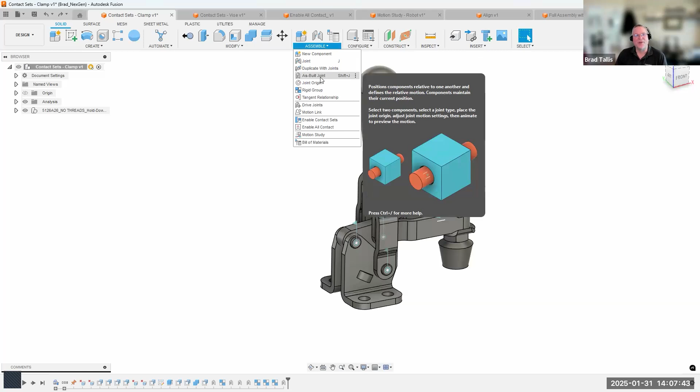Everybody, again, like Chase mentioned, this is a three-part series. We've been going through at a fairly high level, touching everything about assemblies. Last session, part two, we covered the joint command and the as-built joint command. Today's session, I'm going to cover the rest of these commands, such as contact sets, motion studies, bills of materials, and some methodologies for dealing with large assemblies.

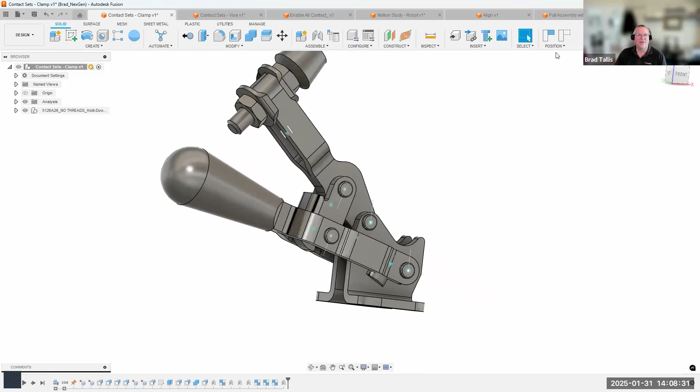In this example, which I showed last session, we used as-built joints to bring in a McMaster-Carr toggle clamp and quickly add as-built joints to simulate how this clamp would work. But notice it has a mechanical hard stop. When I drag this handle, it's basically slicing through that hard stop, and I want to know exactly how far this clamp can move before it physically hits that hard stop.

That's where the contact set command comes into play. You'll notice it says enable contact set and enable all contact. Be wary of all contact - it analyzes everything in your design and uses a lot of memory, with lots of calculations. If you have lots of faces and components, it can really bog down your machine. So I'm going to say enable contact sets, which is basically like turning on a big switch, saying we want to deal with contact sets.

Now if I come into this assemble menu, there's a new command called new contact set, and you can see a new option in the browser. I'll say new contact set - it's a simple command that just asks what are the bodies and components. I'll select the arm and this base, and it will analyze whether these two components or bodies will intersect with each other.

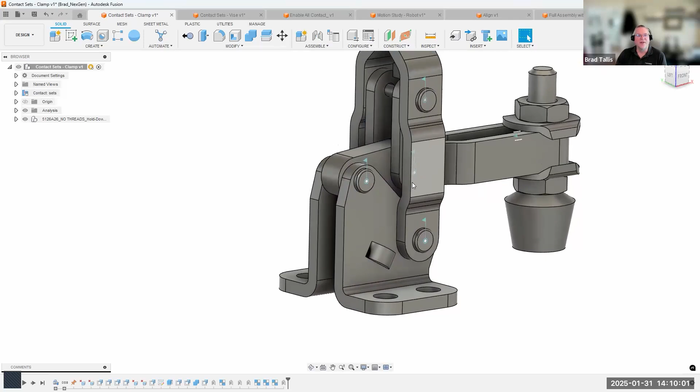Now when I start to drag this handle, everything works the same, but as I continue to drag, it hits that mechanical stop. Even though I'm continuing to move my mouse, it physically can't go any further - it's hit that mechanical stop. Now I know the overall height that this clamp would be. Let's say this is mounted to a CNC machine - I could take measurements and figure out if my gantry will clear this clamp during a fast maneuver.

One of the tips I like to share: I can come under the assemble menu and say drive joints, and click on this Revolute joint. It's telling me that this has rotated 62.8 degrees, so I know that's how far back this handle can rotate before it hits that mechanical stop. That's a cool method.

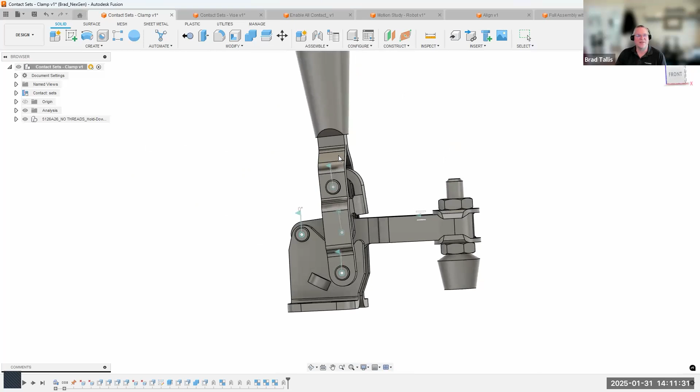Now if I go this direction, you'll notice this piece intersects with that piece there. So I could do another contact set - new contact set, that guy and that guy, I'll say okay. This one still works - you can see it stops back there. And if I go this way, it stops going forward like so. Now we know the physical range that this handle can move in this design using contact sets.

Here's another quick example. We looked at this one last session where we created slider joints and did a motion link to connect the two slider joints together, and also a motion link with the slider joint and the revolute joint. As we rotate this guy, the jaws move, but notice they intersect with each other. Obviously we don't want that, but I want to know when they touch.

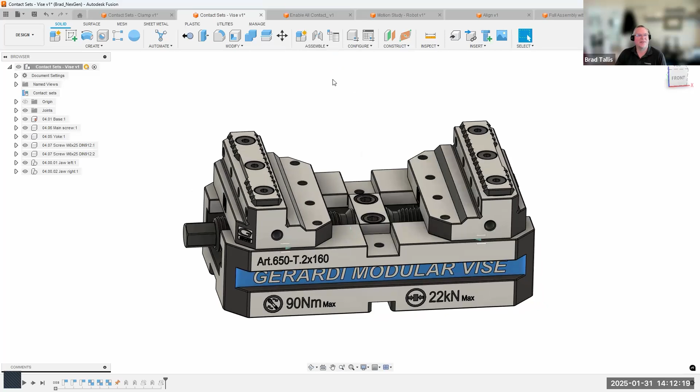So I'm going to do the exact same thing real quick. I'll come in here and say enable contact sets, then do a new contact set, and I'll just pick these two components and say OK. And I'll start to drag - you can see that they stop when they touch.

Now I'm going to zoom up a little bit and you'll notice there's still a gap. This is one of the things with contact sets: I'll drag and then stop, then drag again, because it's doing live calculations. As I'm getting near, it slows down and starts to calculate. So I get close, drag a little more, and you can see how it gets as close as it can. There we go, by zooming up I was able to get a better result.

So sometimes I'll zoom up to make sure I get the result I'm expecting. It's almost like the incremental move: the farther out you are, the more it jumps as you move something, but the closer you are, the finer the precision.

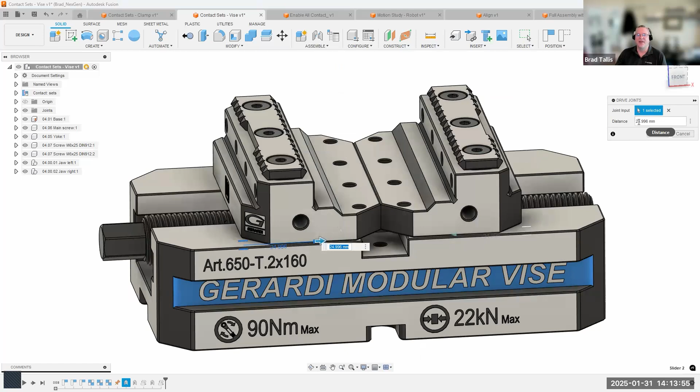It's kind of the same idea with contact sets. So I'm going to come in and do the drive joints and click on this slider joint, and now I have this distance. Why am I doing this? I want to set some limits, so I'm going to copy this with Control C, then drag this out and disable my contact. The reason I'm disabling it is I don't want it doing the live calculation all the time.

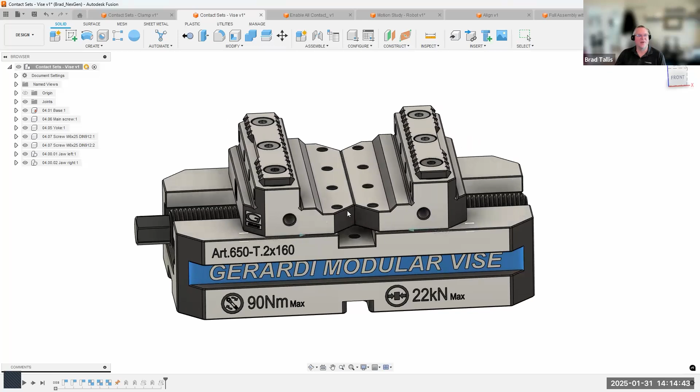Now I can come in and do my motion limits. Let's do the maximum limit, and I'll paste that in there: 24.996. I'll say OK, and now as I drag this, you'll notice it stops — that's the limit it can go. It's not doing the contact sets anymore because we disabled it, but we used the contact set to figure out how far this jaw, or these jaws, can actually move. It's a neat little trick to physically figure out how far these parts can move, and then we use that to set the limits for our slider joint, for example.

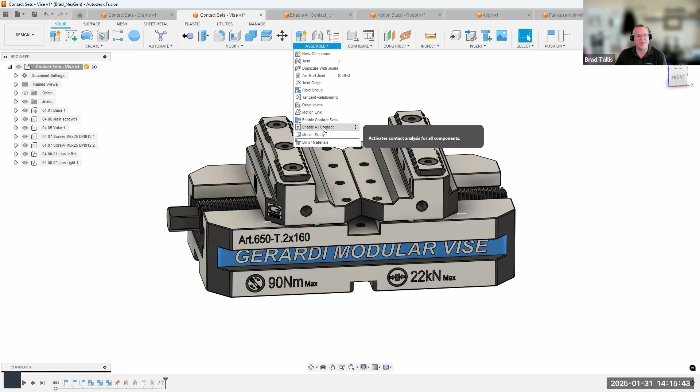Okay, so that was contact sets. We also have this enable all contact, and I'm going to show an example of this in just a moment. Like I mentioned before, be cautious with this one. I would not use it on something like this because of all the faces, and this is running through another part here that might be threaded or something like that. It would take a long time to calculate and you wouldn't get the result you would expect.

But here's an example of what enable all contact does. You'll notice I have no joints in this example, whereas over here we have joints like sliders, rigid groups, and motion links, etc. So if I were to just grab any of these parts, they move around normally. I'll come in here and say enable all contact, and that's all you have to do.

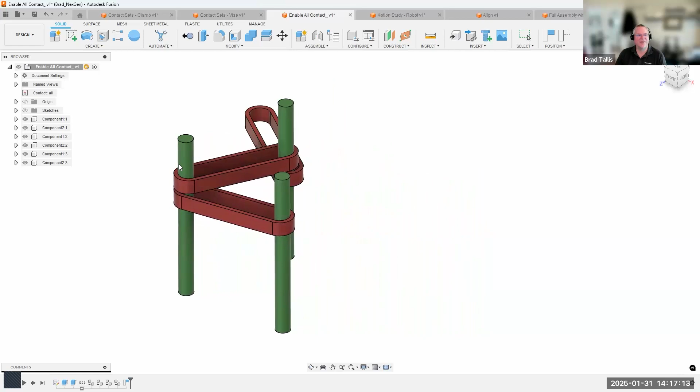If I grab this green bar, you'll notice I can move it around. As I drag it to the right, it's going to catch that red band or that red link, and you can see it's pulling that link. As I continue to drag, it's going to grab that other green bar, which grabs that other link, and now I'm pulling all of those together. Again, it's calculating this live. If I grab the middle one, you can see how it's interacting with all of this together, so we can simulate how these things would work as I pull it along.

Now you'll notice I was dragging it fairly slow because, like I mentioned, it's doing live calculation. If I go too fast, you're going to see it can't calculate. I was actually able to pull the rod out of there, and now I can't get it back in unless I go up underneath or whatever. But it's kind of interesting to see what you can do with this — now I'm rotating that red band around by just pushing up on it.

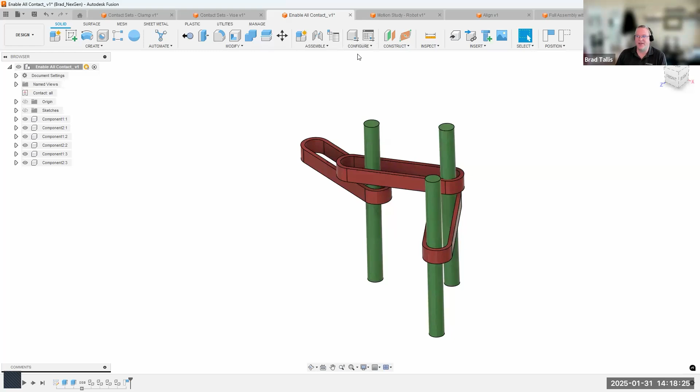So it's kind of an interesting way to simulate how things would interact with each other. Honestly, what I typically do with enable all contact is I will still try and add as many joints to my design that kind of builds the intelligence into my design. So, for example, if I had a robotic arm or something like that, I would build in all the pivots and the rotations and all that kind of stuff. And then I would use the enable all contact to do whatever movement that I want to see in that design. And by having those other joints, it just speeds up the solving, because it knows it can only rotate or something like that.

So I don't use all contact all that often, but it does come in handy every once in a while. But definitely contact sets I use quite often, especially for trying to figure out, like in that vise example, how far things move, when do things contact, what is the range of how far things can physically move.

Okay, the next command is motion study. So here I have an example of a robotic arm. You can kind of see I've got some as-built joints in here so it can pivot and rotate around. We've got elbows and wrists and all that kind of stuff here. So you can kind of see how everything moves together.

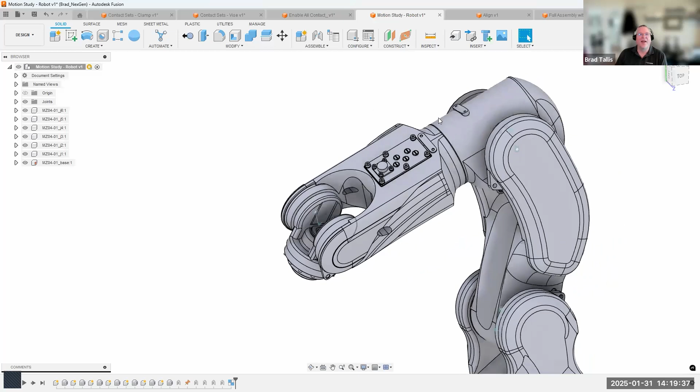And I might want to do what's called a motion study. So I'm going to come in and click motion study here, and let's just move this around so you can kind of see what's going on. And it says select joints to animate. So I might pick, for example, this rotational joint right there. And what it does is it puts it over here. It tells me it's a revolute joint, and then you see this line that goes all the way across, and it's almost like a timeline from 0 to 100. And it says select the curve to add animation points.

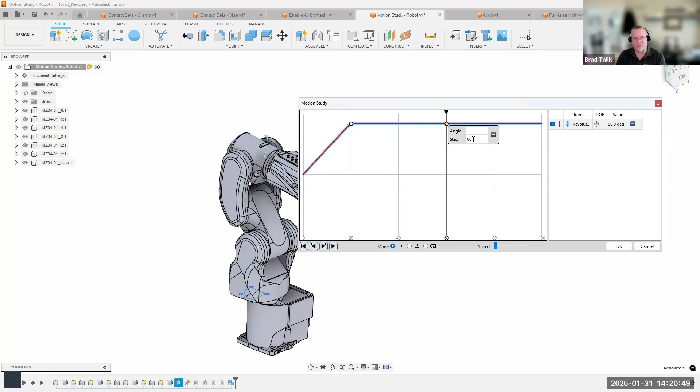So for example, if I click at like point 20, we can see that it's at 0 degrees. Well, I might type in like 90 degrees. I'm just going to hit enter, and you can see that it rotated 90 degrees. And from frame 0 to frame 20, it's going from 0 degrees to 90 degrees. So now let's go to maybe frame 60. I'm going to click over here and let's go to like minus 45 degrees. I'll go ahead and click there. And we can see how it kind of updated that. We're basically telling it at what angle and at what time do we want it to be at that angle. And then finally at like frame 100, let's go back to 0 degrees. I'll do something like this.

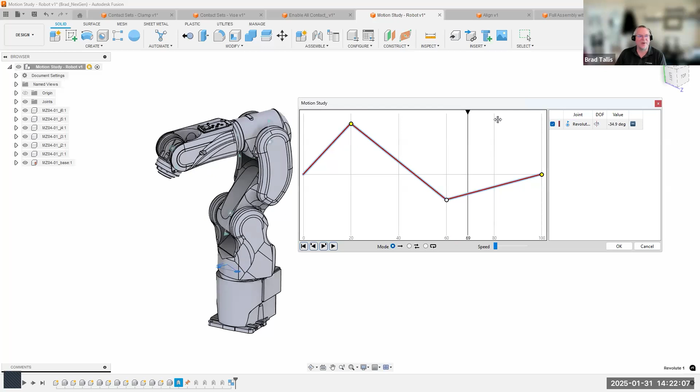Okay, now I can grab this slider and slide back and forth, and you can kind of see how it's animating this movement. It's almost like if you've done video editing, you're basically creating what we call keyframes at particular points in time. And I can hit play and it's going to go ahead and play. You can kind of see how it moved really fast at the beginning and then it went slow near the end. That's because in a short amount of time, only 20 frames, it's moving like 90 degrees. And then over 40 frames, it's moving from 90 to minus 45, so it's having to move pretty far. But then over the next 40 frames, it's only having to move 45 degrees, so that's why it goes pretty slow right here.

Okay, and it's kind of a cool way to visualize how things interact with each other. In fact, as I'm dragging, I can see this value, so I could see that around frame 47 is when it basically goes back to around 0 degrees. In this case, it's about 1 degree.

Okay, well now let's add in some more complexity to this. So I'm going to go ahead and click on another joint. In this case, it's a revolute joint. You can see it put another bar across here, or another line, and we can see that one's a revolute also. I probably should have picked something that had like a slider joint or something like that in here. And I can do the exact same thing. So it's going to keep track of my original move here, but as that's rotating around, I might do something like at frame 40, let's just make that go 25 degrees.

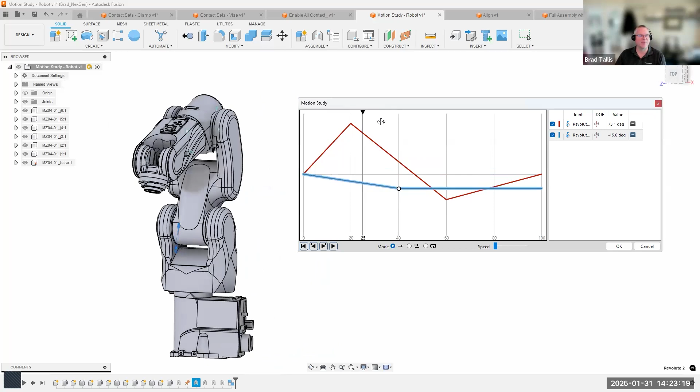Let's make it go and go minus 25 degrees. Okay, so now as this is rotating, you can see that it's bending down a little bit. It's kind of hard to see, but watch this body right here. You can kind of see it's starting back a little bit and then rotating forward. And then maybe we want it to rotate, let's just say minus 90 in this case, like so.

And now we can simulate how that works together. We can continue doing that with any of these joints and basically create something like an animation, but it's more of a visualization of how this thing would work. So let's just do one more.

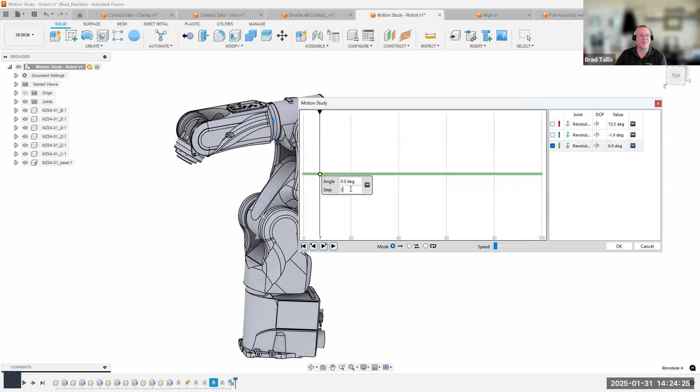I'll click on this guy here, and I want to simulate it rotating from minus 90 to positive 90. Let's go at frame 0. Let me turn these guys off real quick and select that curve. I clicked out here, but I could come in here and say at step 0, let's make that minus 90 degrees, then make that step 1, and then do something like this, and let's make that 90 degrees. Okay, I can turn the other guys back on.

Let's just drag through this real quick, and we can see how that whole thing is rotating and moving around. Now, one of the cool things you can do is you have some options down here. If I hit play, it just plays it once. I can also do ping pong, so it'll go back and forth, or I can do loop, where it just keeps looping over and over again.

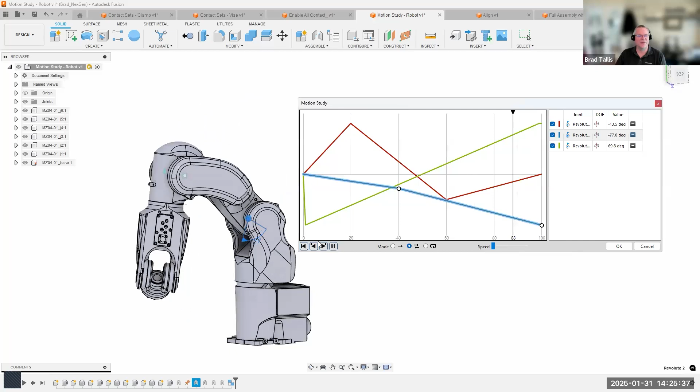I can also control the speed, so we can slow it way down or speed it up. One of the things I typically do is visualize what some of the values are at certain points in time as things are moving around. The fact that I can see what these values are at certain points is pretty neat. Now, when I say OK, it creates a motion study over here. I can always come back and edit that motion study and make changes to it. I can click on any of these points to edit them.

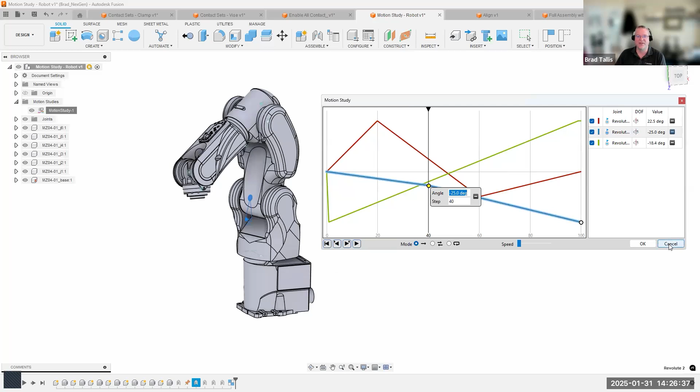So that's basically it for motion studies. Unfortunately, you can't render out a motion study or create a movie of it. I wish you could. If you wanted to, you could do some kind of screen capture, like with Camtasia or ScreenPal or something like that to record the movie.

Okay, I'm going to jump over here. The next thing in the assemble menu is bills of materials, and this is actually fairly new. So I'm going to click on bills of materials, and it analyzes your design.

Now there's a couple tips and tricks with this. You have to have your designs saved before you can do a bills of materials. So if I were just designing stuff and ran bills of materials, it's not going to show anything. I would have to design stuff, save my design, and then run the bills of materials, and then it would show this list.

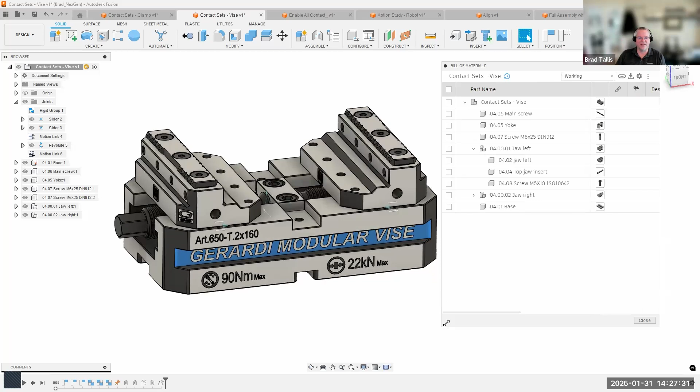Also, there's a lot of information here, so I'm going to stretch this out a little bit. You can see it's broken down into the top level assembly, so I'm going to match it over here. We have the top level called this contact sets vise, and underneath that we have some components and some sub-assemblies like this jaw left and jaw right. You can see that here also, so here's the base, the jaw left, jaw right, the yoke, etc.

And then there's cool little thumbnails. If I just hover over these, it shows what each of these components is—so that's the yoke, here's the screws, etc. And then here's the subassembly of the jaw, and if I expand open this subassembly, you're going to see the individual components that comprise this subassembly.

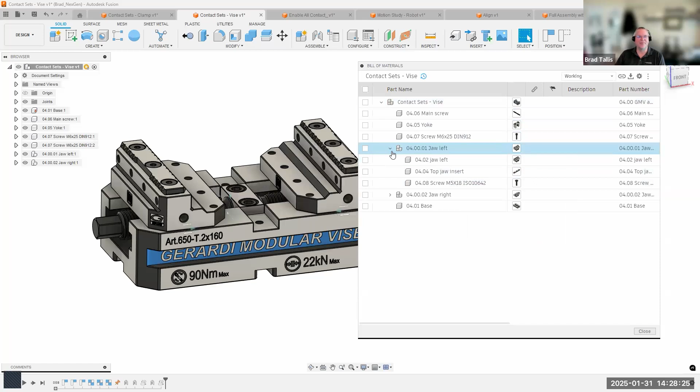Another cool thing is if you click the little checkbox next to any of these, it highlights it in your viewport and also in your browser. For example, if I expand this open and click on just the top jaw insert, you can see it highlights there and in my browser.

If I scroll to the right, I'll come back here in a second. You'll notice it shows a quantity. For example, this quantity of 3 is related to the screws in this jaw assembly, and the quantity of 2 is for the screws in the yoke.

Now, I'm not going to spend too much time on this, but there are some other options here. You can see if the parts were externally referenced, which we'll get to in a moment, they would have this little chain link icon. So if I had inserted components into my design, you would see these chain link icons.

If they were milestoned—when you save, you have the ability to create what's called a milestone. That's kind of like saying, this is revision B, this is revision C. So you could have versions, and then revisions. You might have version 1, 2, 3, 4, and then say, okay, this is pretty cool, this is a good release—let's call that milestone A.

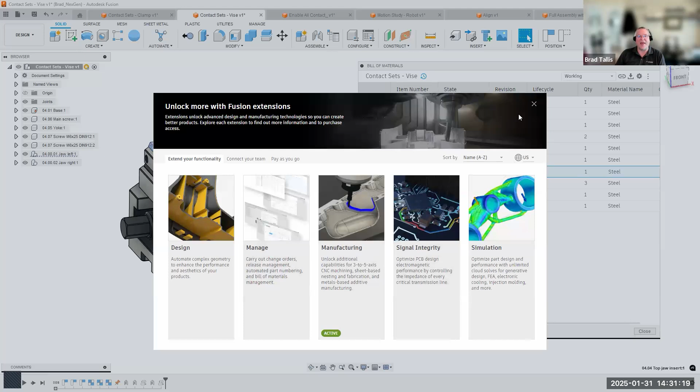If you're going to be doing a lot of this kind of stuff, I'd recommend reaching out to us to learn more about the Manage extension—it will fill in all of this information for you, and also on your drawings. You can see quantity, material, whether there's a change order—that's also part of the Manage extension, same with working state and release state.

We also have the ability to export the BOM as an Excel spreadsheet or a comma separated value list. And finally, with the gears icon, you can change which columns are being displayed. Maybe you don't use milestones, so you could turn that off, or maybe you don't care about material, you could turn that off too.

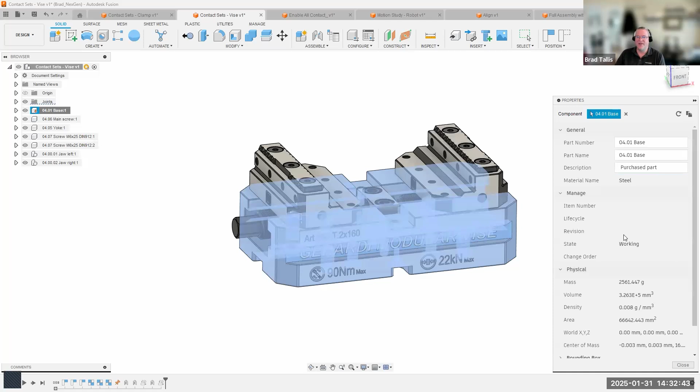Let me do something real quick—let's pick on this base. I'll come in here and say Properties, and it'll analyze this. You can see there's the part number and part name—I could change those. For the description, I might say 'purchased part' or something like that. I'll keep it simple, close that, and go ahead and save this.

Now if I go into the bills of materials, you'll notice it has that 'purchased part' under the description. So anything you do in your design—adding components, changing quantities, updating materials, or changing the description—your bill of materials will update accordingly.

Let me check real quick—I don't see any open questions.

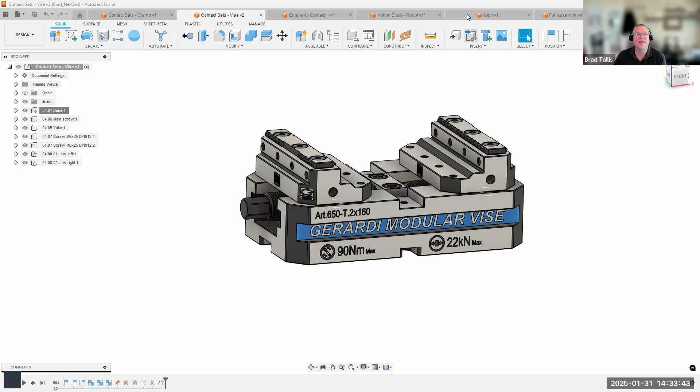So this is another tip I wanted to share. We're going to start talking about working with larger assemblies. I get this question a lot with trying to join parts together that you can't really find a great way to join. Here's a prime example.

It would get it close. Oops, it remembered my last motion type, let me just say rigid. But it's too far up and all this kind of stuff, right?

So how do we go about doing this? Well, there's a couple other options in here, and unfortunately they don't work, but I want to show you these anyway. We have the simple mode, which is basically snap to a point, like a midpoint, end point, or center point. We also have between two faces, which I showed last time, and you're going to see some more examples of that here in a moment.

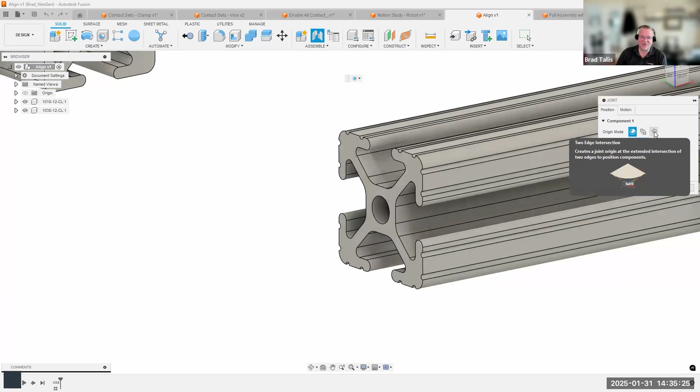But we also have this two edge intersection, which is actually pretty cool. Unfortunately it doesn't work in this case, but I'm going to show it to you anyway. So I'm going to say two edge intersection, and pick this edge here and this edge here, and you can see that it's going to create a joint origin at the intersection of those two edges. So because there's a fillet here, I want to snap to the sharp corner, and that allowed me to do that. But there isn't a sharp corner over here.

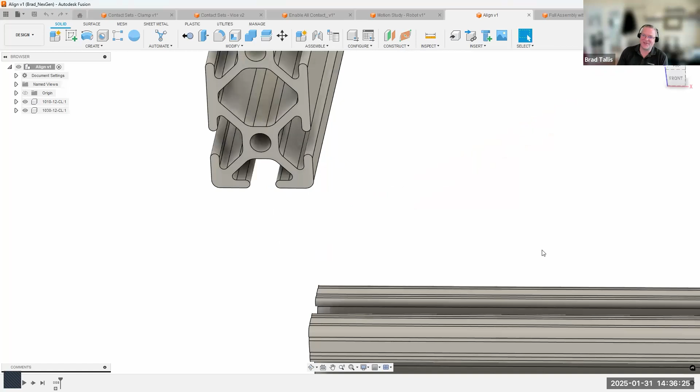So I'm going to go ahead and do a two edge intersection. But the joint origin is pointing in the wrong direction. So once again, it lined them up, but it doesn't give me the ability to rotate it in this direction, which is what I want. I can do offsets and stuff like that, but the angle is only in this direction, which is kind of unfortunate. So that doesn't work in this case. But that edge intersection is a pretty cool command that sometimes works in certain scenarios.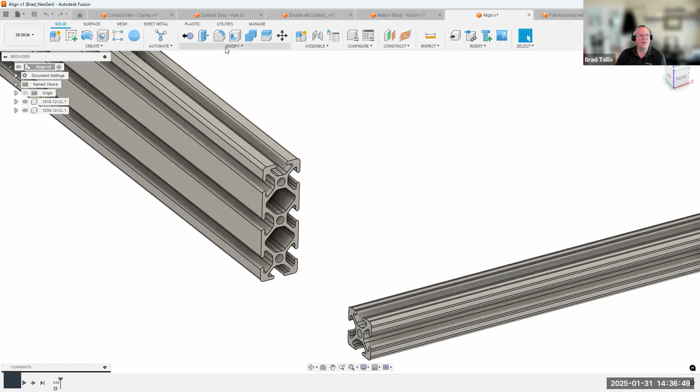So long story short, how would I create a joint for this? I basically want to connect these two together to be rigid, right there—I'm going to basically bolt these things together. So sometimes I will actually use the align command to align these parts together, and then I'll use the assemble command to do like a rigid group or something. Check out how simple and easy this is.

I'm going to come in and say align, and let's just go ahead and align the bottom. All I have to do—I'm going to purposely not catch points and stuff—I'm going to click on that face there, and then click on that face there, and you can kind of see it jumped up a little bit.

So we just lined up those two faces, and I'm going to stay in this command—I don't have to hit OK or anything like that. Now I'm going to say align that face with that face, and you can see how it's still lined up along the bottom, and now it's lined up that direction. So the last thing I need to do is align that face with that face there.

And we've now physically put the part where it needs to be. So I'm going to go ahead and say OK. You can kind of see there really isn't a great joint option for this, but now I could come in and say rigid group. Let's go ahead and say that guy and that guy, I'll say okay, and now they're connected together. So I actually use that align command, especially in situations like this where there really isn't a great way to create a joint.

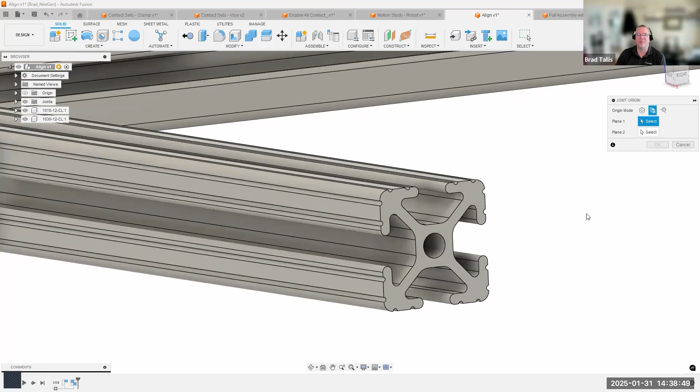Now the other option in here is to use this joint origin command. This allows you to basically create a joint origin, like I just showed with the two edge intersection or between two faces. So let me go ahead and show between two faces really quick. I'll say between this face here and this face here, and you can see how it's basically splitting between those two faces. I can click a point and it's going to create a joint origin between those two faces at that edge.

So I just created a joint origin on that part, and I could potentially use that to connect it to something else. So you could create your own joint origins and not rely on just the ones that automatically pop up.

Okay, hopefully that makes sense. I use that one quite often, actually, the align command. Now, do not just use the align command, okay? Let me explain why here really quick.

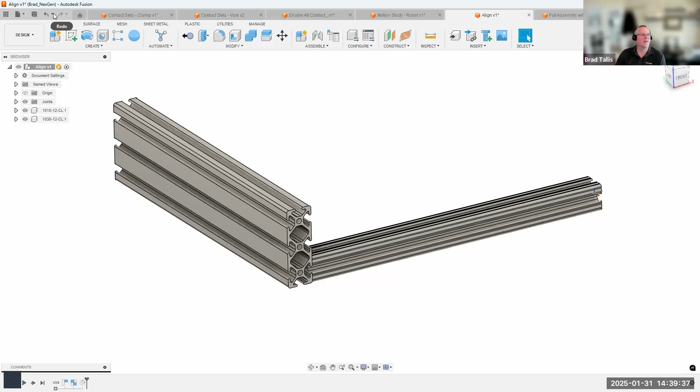So let me undo my rigid group. We did the align command, but if I don't do a rigid group and I drag that part, there's no connection to it and there's no relationship. So I lose everything. The align command gets it where you want it to go, but then you do need to create some kind of joint, whether it's a rigid group, an as-built joint, or a regular joint. So align gets you close, but you still need to build some kind of relationship.

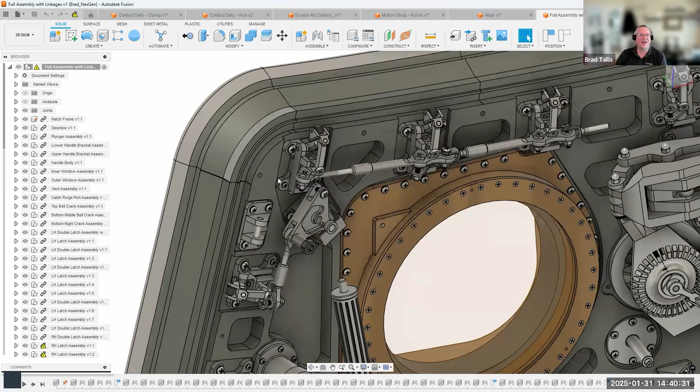Okay, moving on. So, dealing with large assemblies. As you can see here, fairly large assembly. This is an Apollo 11 hatch. You can see we've got some components here and they're all linked together. If I drag this, you can kind of see how these linkages open and close the door and stuff like that.

Now, how would you deal with something with all these screws and bolts and stuff? There's a ton of parts. Last time we talked about bottom up design and top down design. You can see in this example all of these little links, and these are what's called external references. This is what I would consider the bottom up design. So all of these individual components and sub-assemblies are created individually and then assembled into this assembly here.

And I'm going to show how to do that. Hopefully this will make more sense. But here's a prime example. Let's just take a look at this right hand latch assembly. I'm going to go ahead and open this into its own window.

And don't worry about the warnings, I've been kind of messing around with stuff here. But you can see, now this is like that subassembly. So it just has this many parts. You can see it has some joints in here and all kinds of stuff, but each of these parts are linked into this assembly.

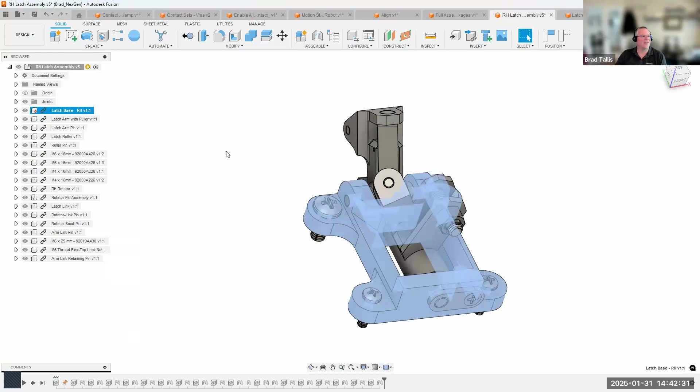Then they created another component. Let me just go ahead and open this. Here's the steps that were required to create this design. Then they switched into what I would call an assembly mode. They started a new design and they started inserting these designs into that new design, and started assembling them together using the joint command.

So that's why you're seeing these little link icons - they were inserted in. They inserted the metric 6 and the metric 4 screws, et cetera, et cetera. And then they built this as almost like a subassembly. Then they came into this design and they inserted that subassembly into this top level assembly. So that's kind of that bottom up approach - they just keep inserting things up into this top level assembly.

Okay, now why would you do this? Well, check out this complicated assembly. Check out my timeline - it's actually not that crazy. All it is, is inserted components, and that's pretty much it. There's no fillets, no chamfers, no extrudes or sketches or anything like that.

Remember, with parametric modeling, the timeline is like the recipe. Every single time you do something, it reruns the timeline, and so it has to recalculate and redo every single step in the timeline. So imagine all of these as bodies or whatever - it would take forever to do something.

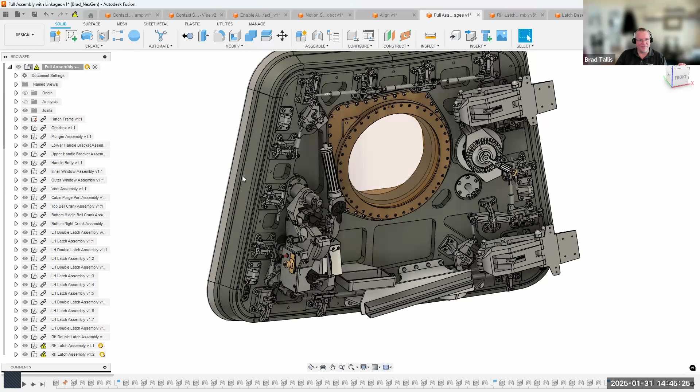If I were to do this in a top-down design, let's say I design this piece here and then create this piece in context, because I already modeled this. I know that this piece goes here, I know these screws go here, and I just keep designing on top of all these other parts. My timeline is going to get a little bit more complicated, it's going to have to calculate all those things.

Think about how this repeats, basically rinse and repeat, how many times that's happening all around this design. That could take some time to calculate every single time I add a fillet or do a move or something.

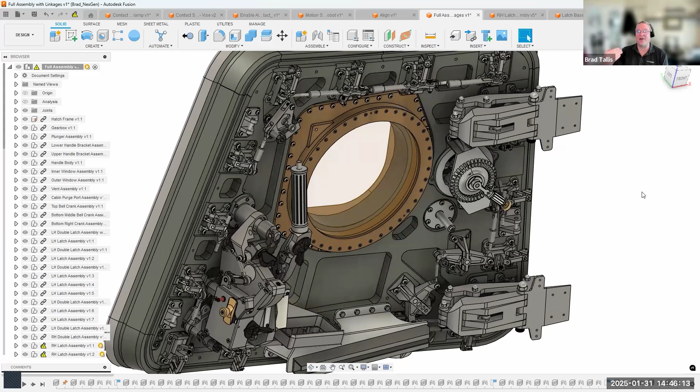So let's take a look at how I would approach this, or how you would approach this. I'm going to start by taking a look at the hatch frame. Let me close these out - don't save that, don't save that, don't save that.

So I'm going to open this hatch frame, and it's going to be just a plain Jane model, right? Here is all of the steps required in the timeline to model this particular part.

I'm going to go ahead and save this. I'll say save as, and I'll just call it demo for now.

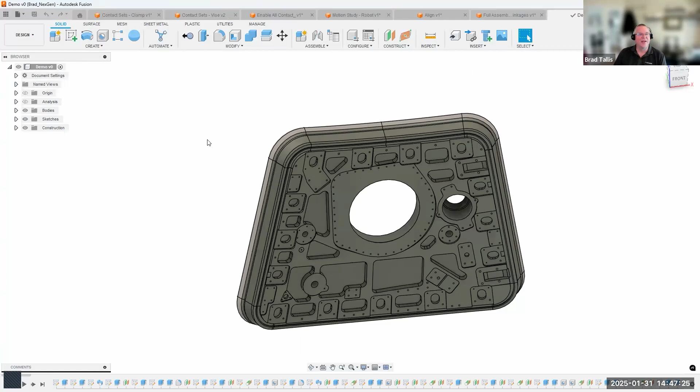Now I'm going to go ahead and insert one of those sub-assemblies. Again, I'm doing this at a high level, so imagine I created each of these individual components, then assembled some of those components together into a sub-assembly, like a hinge assembly. Now I'm going to bring that hinge assembly into my design.

I'm going to come into my parts and look for it - I'll scroll down to the H's so you can see lots of components in here. Here's that hinge assembly, so I'm going to say insert into current design. You'll notice it comes in at 0,0,0.

So one of the first things I usually do is move it out of the way. I'm going to move it over here a little bit and just say OK. And excuse me, you'll see the little link icon.

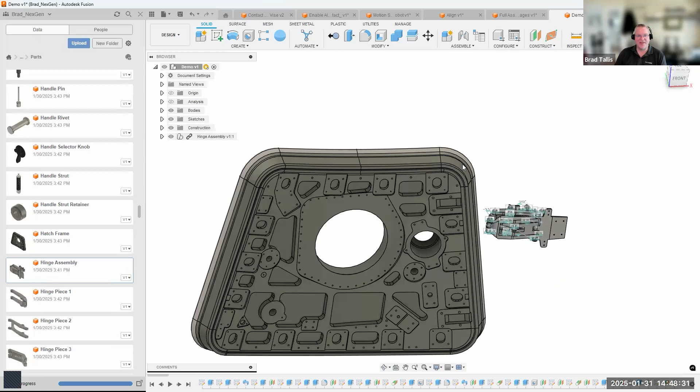What this means is, for example, I can't change this model - I can't add a fillet to this edge. If I click on that and right mouse click, you'll notice it doesn't show the fillet or chamfer command because we're referencing the design. If I want to add a fillet to that, I would actually have to open this and edit the model itself, not the referenced assembly.

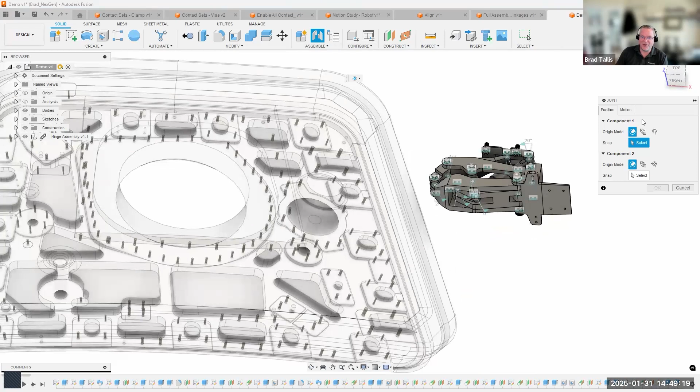Okay, so here it is floating in space - no pun intended. I want to now put it in the correct location. Let me minimize this real quick. I'll say create a joint, and like before, which one do I want to move and where do I want to move it to? Well, this is the one I want to move, and I want to move it over here.

So I'm going to zoom up a little bit and hover over that circular edge and click. Then I'm going to find the exact same circle - this was in the upper left, so I'm going to come over here and click on this upper left circle right here. You'll see it remembers my last motion type, which happened to be a rigid motion type.

Now, here is a tip. I'm going to do it correctly first so you can see it, then I'm going to make a mistake to show you why I do this. You might think I want to rigidly put this in place, but I'm actually going to do a revolute - this will make more sense in just a moment. I'm going to do a revolute and say OK.

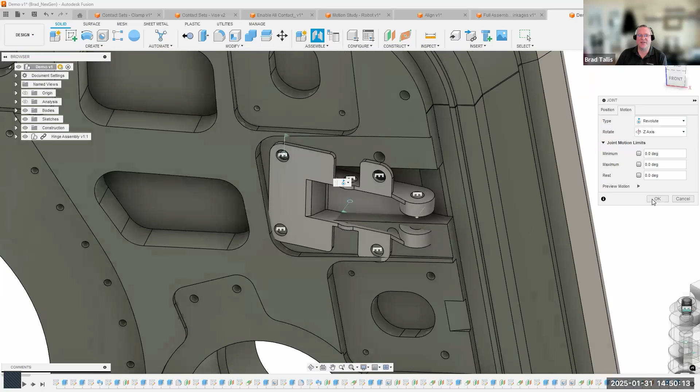You'll notice in the preview it was just the plate, but as soon as I said OK, all of the other components moved into place because they have all of these joints - they know they have to be attached to that plate.

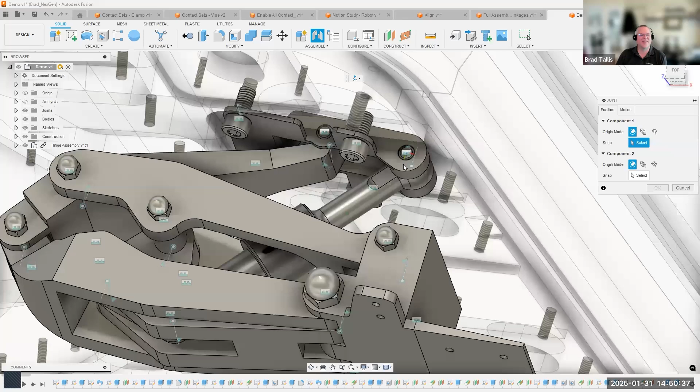Well, it's still not in the correct location, so I'm going to go ahead and do another joint. And what's cool about this, I think it's really neat with Fusion, I can rotate around and see the back side of this and even pick through.

So I'm going to come over here and say, I want that circle there. And then I'll go ahead and grab that circle there. Now you might get a warning message saying it already has an assembly relationship of Revolute. This may cause a conflict. Do you want to continue? Go ahead and say yes.

So I'm going to go ahead and say continue. And you can see it gives it a little bit of a preview. I'm going to say okay. And you'll notice it kicked into the correct orientation, and we've now created that. And if I grab this hinge, it's now positioned where it needs to be and it correctly works.

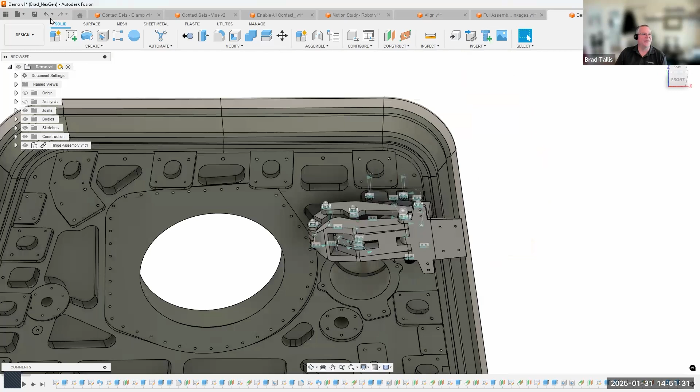Now I'm going to undo this. Let me show you what you would think to do and why it doesn't work. So I'll go ahead and say joint, and I'm going to change the motion type to rigid. Because basically you can think of it as just aligning those holes up.

So I'm going to go ahead and do the exact same thing. I'll select, and I need to zoom up to make sure I grab the right edge. So I'll select that edge and this edge here. That gives me a nice preview. I'll say okay, then do the exact same thing again - rotate around, grab, and click.

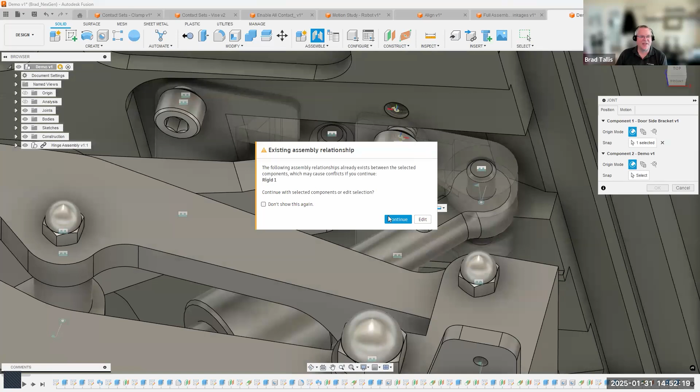Get the same warning message. I'll say continue, it moves in place. I'll say okay, but this time I get some warning messages. I'm going to expand that open, and you'll notice an error message saying there's a distance conflict due to joint type. That's basically saying because this is rigid, it can't rotate up - I can't move it to make those work.

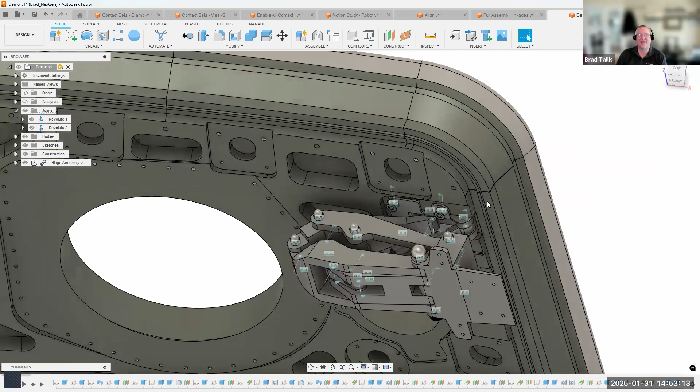So that's why I use the rotation or revolute joint type. In fact, I could even come in here and edit this joint and change it from rigid to revolute. I'll say okay, then change this joint type from rigid to revolute. I'll say okay, and you can see that it updates. So I actually use the revolute joint type quite often, even more than rigid in cases like this, especially for lining up holes and stuff.

Okay, here's another cool example of where duplicate with joints really helps. So I'm going to go ahead and say duplicate with joints. What's the component? I'm going to click on this hinge assembly. The only thing with this is you kind of have to remember the order that you did things.

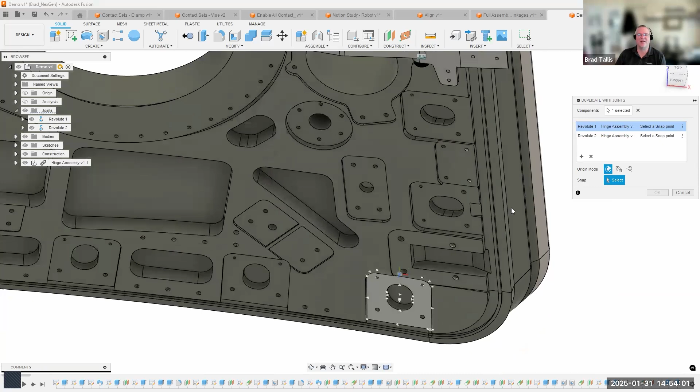Because it's asking for a snap point, I'm going to click on this first revolute, which I remembered was this one over here. So all I have to do is pick a snap point of where I want it to go. I'm going to click there. And then I'm going to click on this guy here and click on that circle there. And boom, we're done - this one updates accordingly too.

So I didn't have to reinsert it in, I didn't have to do a bunch of stuff - I was able to use duplicate with joints. And if I were to save this really quick and do my bill of materials - oops, wrong one, this one - we'll see that the hinge assembly has a quantity of two, which is correct.

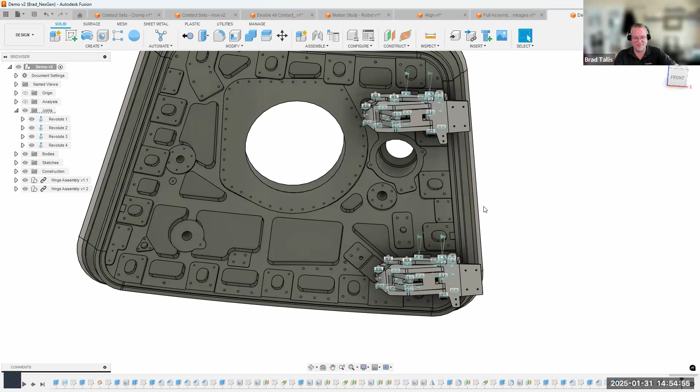I'm going to do the exact same thing again real quick. We might go a few minutes over just because I think this is important. So let's see, I want to do a medium.

Okay, oh sorry, let me do - I have my notes here. I think I went too quickly. Oh yeah, there we go. Sorry, okay.

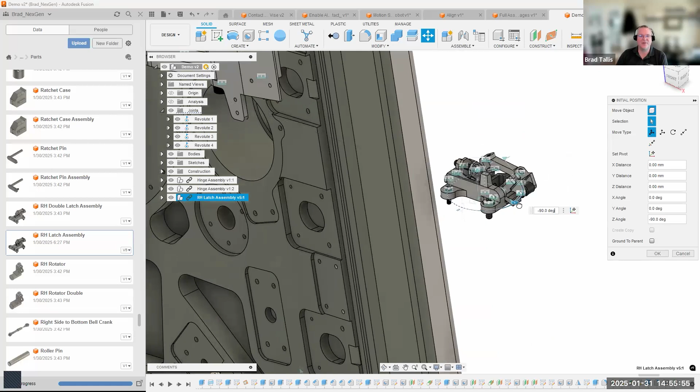RH latch assembly, okay, I'm going to insert this latch assembly into the current design. Here's another tip that I typically do - you can see this latch is sitting flat like so. I know it needs to go here. So one of the things I typically do is use this free move to orient it pretty close to the direction I think it's going to be going in. So you can see it's still going to be off from that, but it's close, right?

I think it's just easier to understand which circles I'm clicking on. Another trick I do is expand open this latch assembly and turn off these screws that are kind of in the way, so now I can pick these holes a little easier than when they were turned on. The threads were getting in the way. You can always turn these off and they'll still move with the assembly, which is kind of cool.

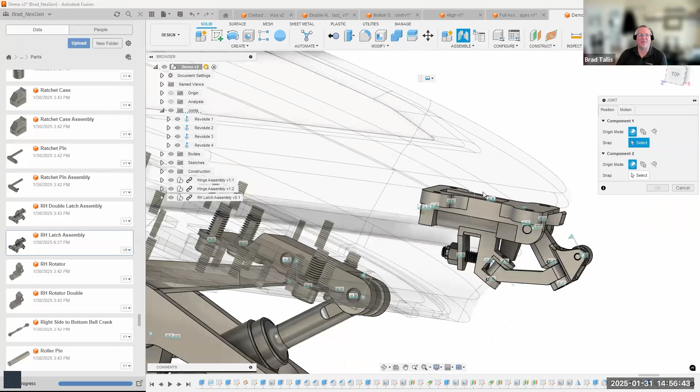I'm going to do the exact same thing. Let's put this top left hole here, do a revolute, say OK, repeat my last command. You can see how much quicker this is, not worrying about those screw holes or screw threads getting in the way. I'll say OK, it'll do a revolute, say OK, and that assembly is now in place.

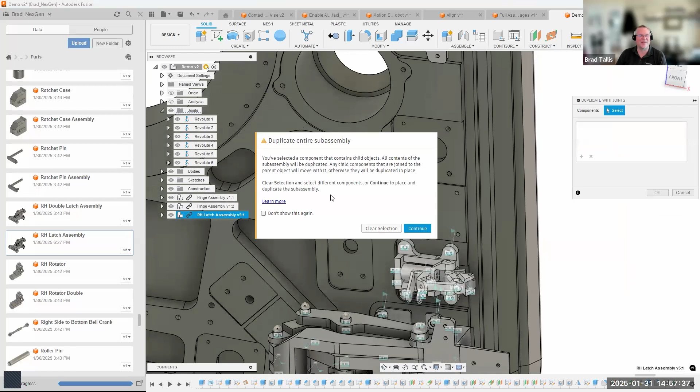I can come in here and do assemble, duplicate with joints. What this is basically saying is all of the contents of the subassembly will be duplicated. Any child components will move with it, so it's just telling you we're duplicating the whole assembly.

I'm going to do the exact same thing. I know I did the top left one first, so I'll click the top left circle, then click this guy, do the top right circle, say OK, and we now have that one done. I'll do one more for kicks, same assembly, put it here, and say OK. So really quickly, I was able to add in all three of these hinge or latch assemblies.

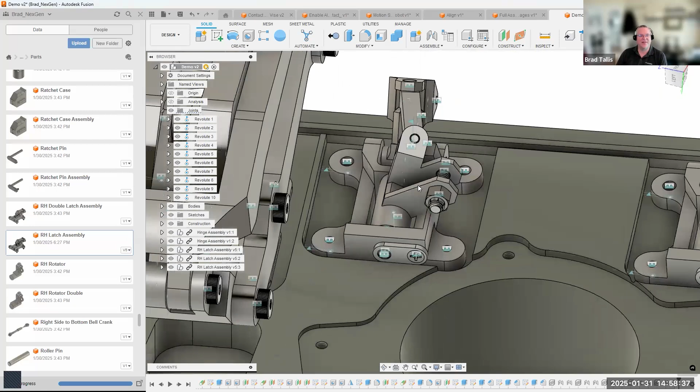Now you'll notice that as I rotate these, they clash with each other, so I obviously don't have any limits set or anything like that. That's something we might want to do. I know I'm running short on time, but I just wanted to show building some more stuff in here, how quickly and easily you can do this using inserting these references.

So I'm just going to add in a couple more and then we'll call it good. Let me do this guy. Now I want to link some of these guys together.

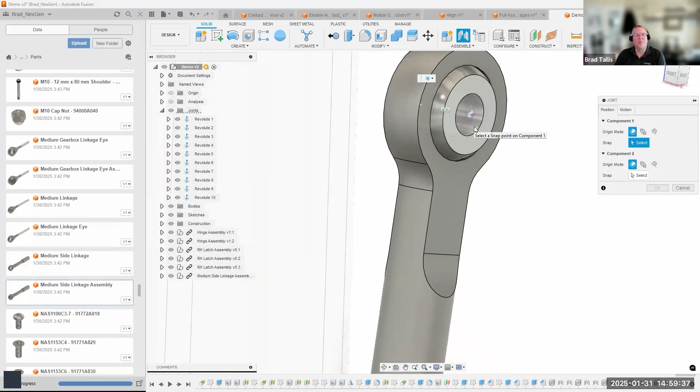Here's an example where I'm going to drag this over and rotate it close to the orientation I think it should be. I'll say OK, create a joint. Now this time I want to do a ball joint, and I'm just going to select the middle of this ball socket. It's kind of hard to see because there's a symbol in there already, but I'm going to grab that middle point right there.

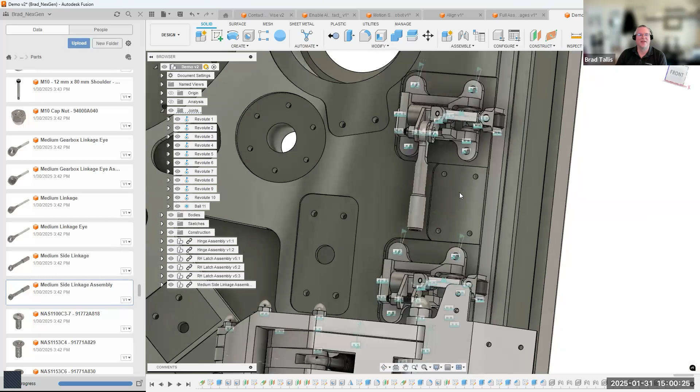Now I want it to go on this threaded component right here, but there's not really a good place to pick, so this is where between two faces comes into play. I'm going to say between that face and that face, and then it's asking for a snap point. I'll get near that circular edge, and you can see that plane that's appeared in the middle, with the snap point right in the middle. When I click there, it's going to put that ball right in the middle, and when I say OK, it puts that ball link in place.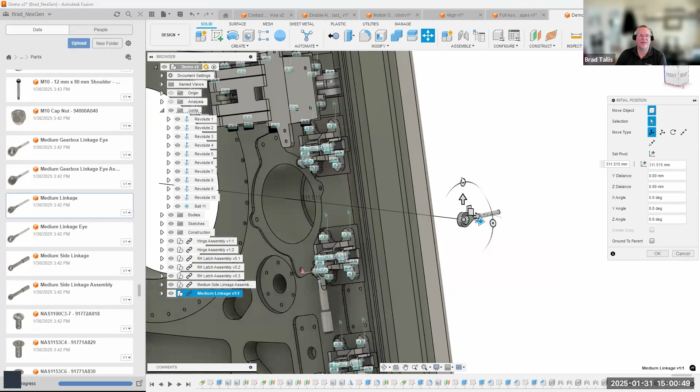That's a ball joint, so it's going to allow it to pivot and rotate accordingly. Now I want to go ahead and do the other one here. I'll say insert into current design, do the exact same thing, drag it around, rotate it vertically in this case, joint. It remembers my last motion type, so it should remember the ball motion type.

Once again it's got the threads on there, so I'm going to say between two faces, that guy, click on the circular edge. It puts, and you can see the preview of the ball there. I'll say OK, and we now have that connected together.

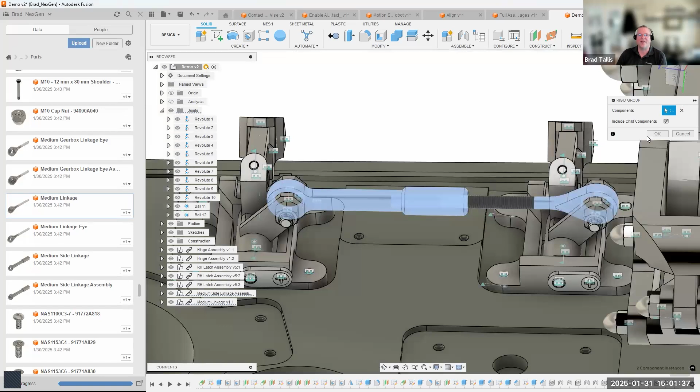Now, is it connected together? No. If I were to drag this, you can see what happens there. So how do I connect these two together? I'll just come in here and say rigid group - that guy and that guy are rigid with each other. And now if I grab it, you can see how those now move together and these latches now respond together like so.

Now if I go like this, we can see how that intersects. I could come in and add joint limits in this design here, or let's go ahead and click on it. That's the right-hand latch assembly. Let me just go ahead and open that into its own design.

In this case, I would use the enable contact sets, that guy and that guy. New contact set, that guy and that guy. I'll say okay, and now as I rotate this, we can see that it's going to physically stop.

And I could come in and do the drive joints. Now we can't see because the joints are turned off, but I know it's that one there. So I can see that the rotation is 8.8 degrees. So I'll come in here and set my maximum to 8.8.

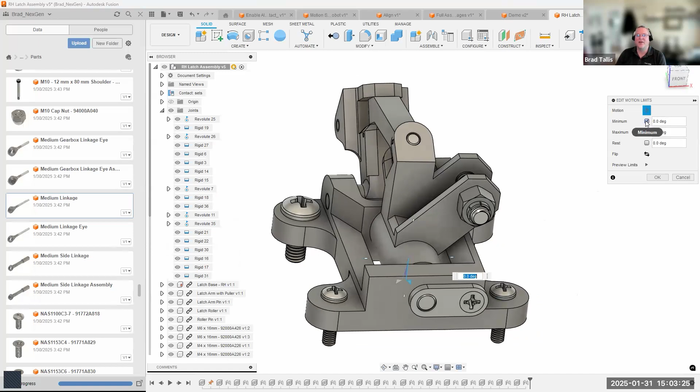And then my minimum, I'll go ahead and just hit OK for now. So you can kind of see how it's calculating that really quick. So then I would come over. Yeah, I need to edit that. This is what happens when you rush. I think that needed to be my minimum. Yeah, it needs to be turned off. So I'm going to turn that off, say OK.

So I was limiting it between 0 and 8 degrees. That's why it wouldn't let me rotate. But see, if I go this way, I can now see that that's hitting there. I'll go ahead and drive the joints for that and see that that's minus 62 degrees. And we'll edit the limits there, paste that in, say OK.

And I will turn off the contact sets. And now we should have, as I rotate this, I can see the total minimum and maximum. It's not using the contact sets, but I used the contact sets to figure out the total throw that this can physically go. I'm going to go ahead and save this into this design here.

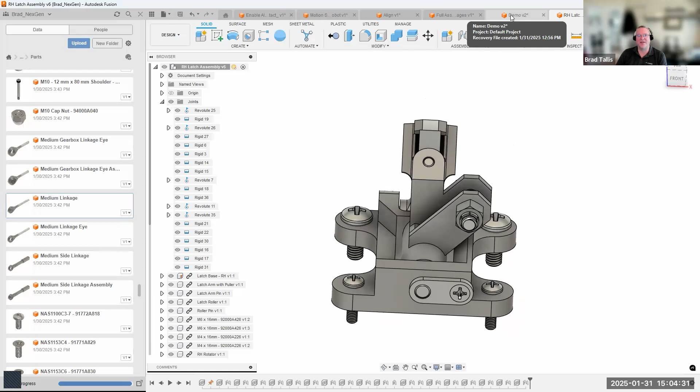And then watch what happens when I go back to my demo. You'll notice I get a warning message saying references are out of date. Click on it to get the latest. It's actually showing me that these little icons here are out of date. So again, notice still clashes, right? If I click on this little icon here, it's going to grab the latest version of those latch assemblies. And now as I rotate, you can see it's now using the limits of that to rotate.

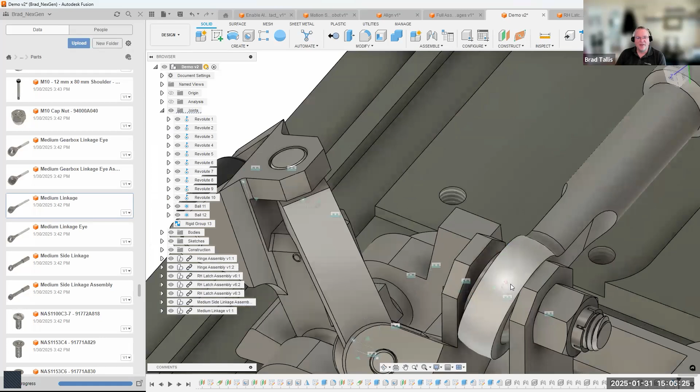So now I should probably set some limits for my ball joint. I'm not going to do that, but you can kind of see how it's rotating a little bit weird as I rotate around. But I could set the limit there. Well, actually, I will do it since we're here. I'll click on that joint right there. I can edit the motion limits here, and set the minimum maximum for, let's just say -5 degrees and +5 degrees or something like that, just so it can rotate a little bit, but not so much that it conflicts with the hinge there.

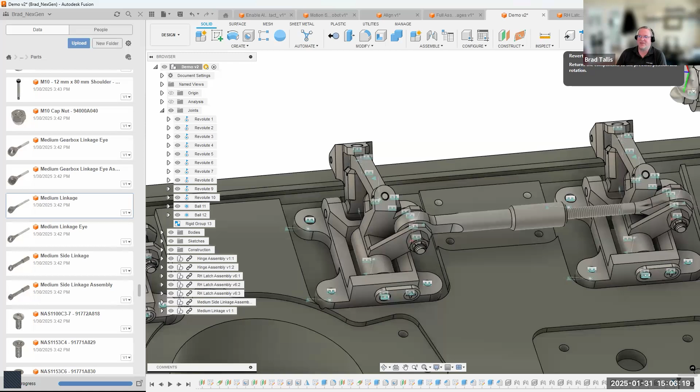Quick question, Brad - John was asking, could you have deleted the contact sets after you had the values? Yeah, so I basically just turned them off, but yeah, you could remove them once you're done. That's a great question. I just used them as reference, and then once I've used them, I could remove them or delete them. But when you say delete, they just go away - they're not there anymore. So you have to create new ones to recalculate them.

Okay, anyways, I was gonna show one last thing. So this is bottom up design, so I'm inserting in these references and stuff like that. But let's say I want to create a part that attaches here. I can do top-down design also, right? So I could come in here and say new component, and I'm just going to call this strut or something like that.

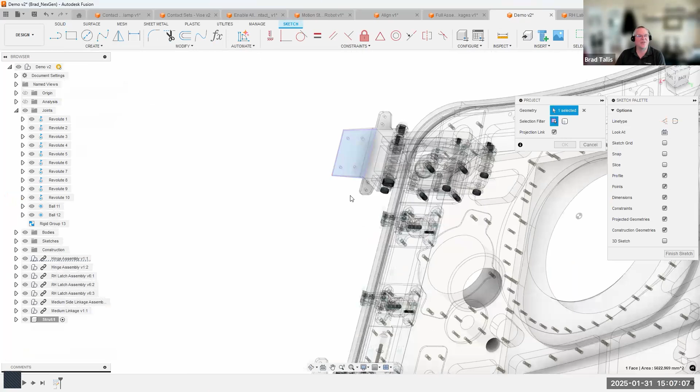I'll create this maybe on this back face here, and project that geometry. I'm not going to spend too much time on this, but just to show you this is what I'd call in-context design, using information from the model to help create this design. I'll finish my sketch, grab this information, and extrude this, let's say 8 millimeters in this case. Now that part is exactly where it needs to be.

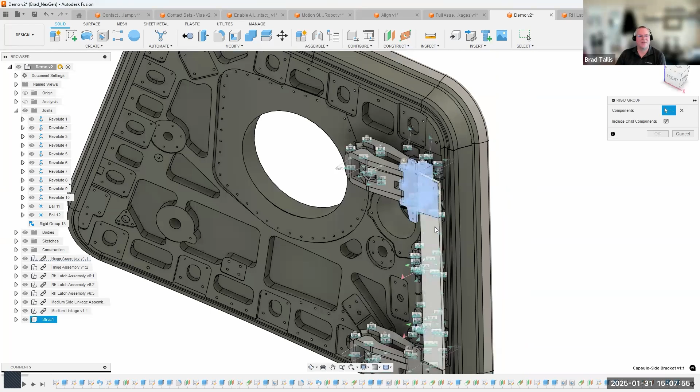So I'll activate that again, so it's exactly where it needs to be. But if I were to rotate this hinge, you'll see it's not associated with it in any way, shape, or form. So I'll come in here and say rigid group, and attach those two together, say okay. Now when I move that, you can see how that rotates together.

I also want the other hinge to move with it, so I'm going to say rigid group again, and let's do that guy and this guy together. Now I start to rotate and you'll notice it doesn't work.

This will happen every so often. Why does this not work? I don't know, it has something mathematical in it that it doesn't like, and basically because these are all connected together, it can't rotate that and that at the same time mathematically, for whatever reason. I couldn't tell you why. So I'm going to undo that. So how would I get this to work? I'm going to undo those rigid groups.

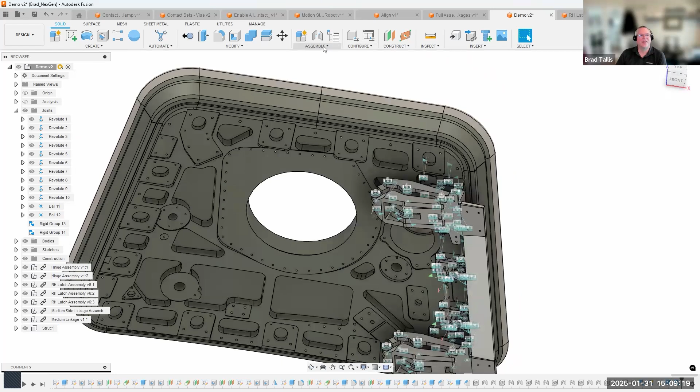Let me make sure... yeah good. So what I'm going to do is say rigid group - that guy and that guy are connected together. But then what I'll do is say motion link, and link one of the rotational joints, like that joint there and that joint there. Keep them the same, I'll say okay.

And now if I rotate, if that joint rotates, that joint has to rotate. This guy is rigidly attached to just that paddle there, and so this works. It's kind of an interesting example, but those linked together work. This is rigidly attached here, it's not rigidly attached down here, and so this did work.

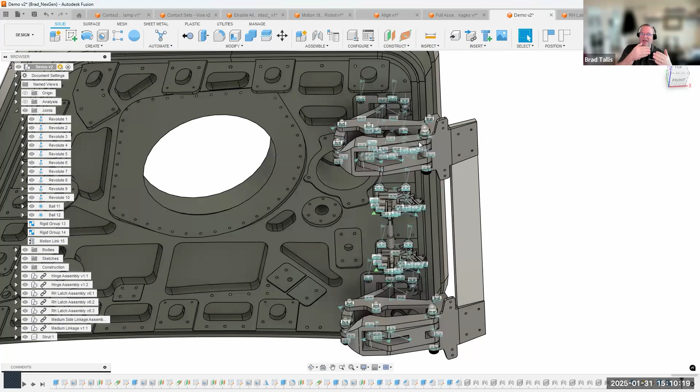So you might have to try different things if you lock down your design. If something happens and you're like, why is this not working, try using revolute instead of rigid, or try using cylindrical instead of revolute. It might need to move up or down as it's rotating ever so slightly.

In fact, I ran into a prime example of that as I was playing around with this. I was trying to position a part on this face - well guess what, this face is not flat. So this hole here is not planar with that hole there. I had to use cylindrical to get the part to sit planar, even though it wasn't planar. I couldn't have used just Revolute, it wouldn't let me, but it let me use cylindrical. So little things you might run into as you're creating joints inside of Fusion.

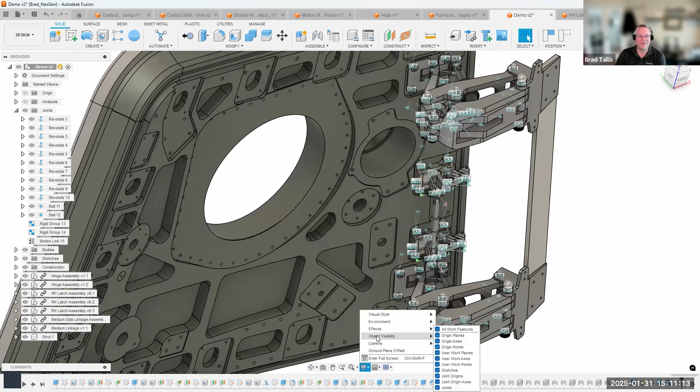And then the last thing - you'll notice how crazy busy this looks with all of these joints on here. If I come down to my display settings, object visibility, I can turn off the joints. However, they still work, it just doesn't display the icons. So sometimes you might want to do that if it starts getting kind of crazy busy.

Okay, man. Again, drinking from the fire hose of information here.

Hopefully this painted a little bit of a picture for you for the assemblies class that Chase mentioned at the beginning. We'll obviously dive deep into how you create assemblies, whether it's better to use external references or bottom-up design versus top-down design, et cetera. We'll go more in depth and talk about the different joint types.

Umair, I don't know if you want to hop on really quick and talk about some of the methodologies and tips and tricks you might share in that class too - not to put you on the spot. No, absolutely, thanks for the call out. We're hoping to do a lot of these similar types of CAD and CAM workflows too, so a lot of what you've discussed here today, Brad, will probably help us show people who are trying to bring in fixturing and things like that into their machine simulation builds, and how joints and assembly work can help with that. There'll be a variety of different topics, but a lot of it will be very close to what you've discussed today.